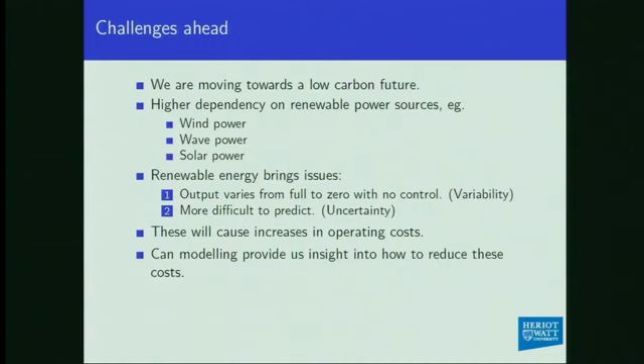So the question is, can we model these? Can we gain insights from some simplistic models, which will then feed back to help us understand how to reduce these costs? So hopefully you'll see these are really quite simple models which try and capture something about what's going on. They're not going to be realistic in any way, shape or form, but I hope they give us some qualitative insight as to what's going on and the behavior, and understand some of the statistical properties which are important for the systems.

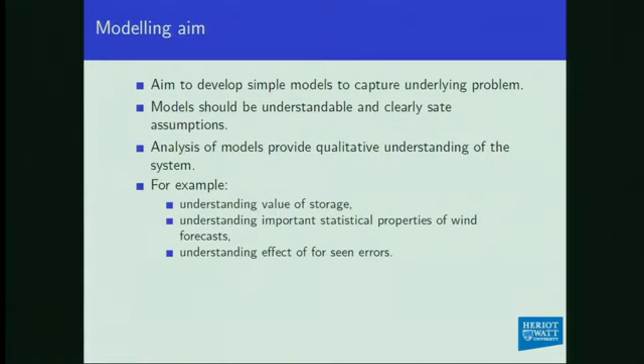So the sort of questions we're trying to look at answering here are understanding the value of storage, understanding what sort of statistical properties you want errors for the wind forecast to look like, what are bad errors, what are good errors, how do we deal with effects of errors we know are coming, but we don't quite know how big they're going to be or when exactly they're going to come up.

So I'm going to look at three models. I'm in the sort of wrong order for the talks, but each one really relates to one of the talks coming after me. So the first one is going to be a very simple model, which actually you've seen most of already, because Jean-Yves gave a fairly comprehensive talk about this. But we've been looking at it from a slightly different perspective, and we're also starting on some of the extensions beyond what he did. So in a sense, that model you've seen before, but I will go through that one in quite a bit of detail as well, and also talk about a slightly different perspective on demand shifting, how demand shifting might fit into that modeling framework.

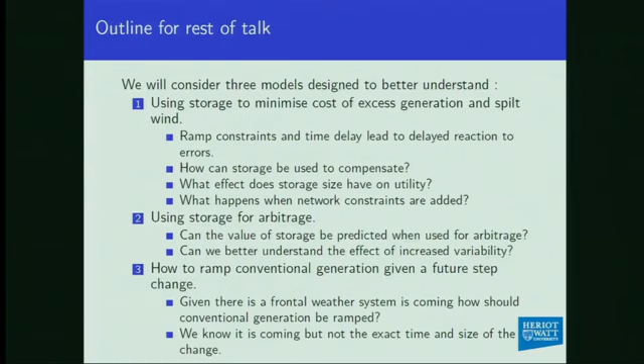Then, so that's using storage in some sense for reducing reserve setting and excess conventional generation. Another use of storage, which is often touted as one of the main values of storage, will be in arbitrage. So can we start to get a feel for what the value of storage in arbitrage is going to be? We're going to take a very simplistic view. We're going to assume that we're God, we know everything, and we're going to run our store the best we can and try and understand what the policy looks like to run the store, and then start backing off full knowledge.

And then finally, if we know something's going to change in the future, we know there's going to be a change in the sort of setup. So for example, a frontal system is going to come across the UK, but we're not sure exactly when it's going to come, exactly how big a change it's going to bring with it. How should we be looking to ramp our conventional generation either up or down at that time to deal with that change, to minimize our costs?

Okay, so I'm going to look at these three. I'll look at storage for balance, and then storage for arbitrage, and then finally minimizing cost errors. So storage for balance. So we're looking at developing a sort of framework to study storage in terms of balance, and also then think about the issue of, can dynamic demand fit naturally into this sort of framework? Is dynamic demand, in some sense, for these purposes, just the flip side of storage when we look at these sort of simple models?

And one of the driving questions that I've been interested in is, we talk about wind data. We know we don't have enough wind data in many circumstances. So if we're going to create fake wind data, can we understand from these simple models what statistical properties fake data really should be doing well? Because no fake data will do everything well. So can we understand what the fake data should be trying to do as well as it can?

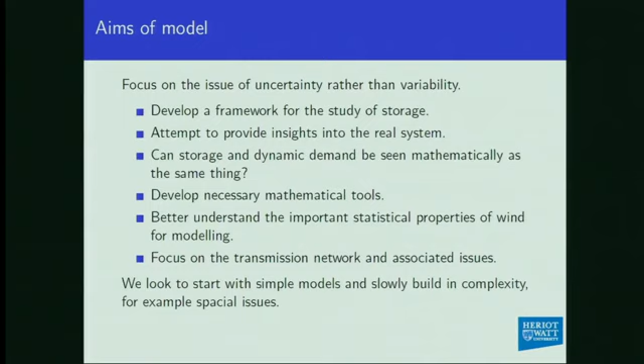And for this talk, I'm going to be thinking about transmission networks and associated issues, none of the DNO stuff that we saw yesterday. But there's lots of interesting problems there, and I'm sure lots of interesting talks from that perspective later on. And it's very simple models. So very similar to Jean-Yves' simple model, these are going to be very simple models. We'll start with single stores and build up from there.

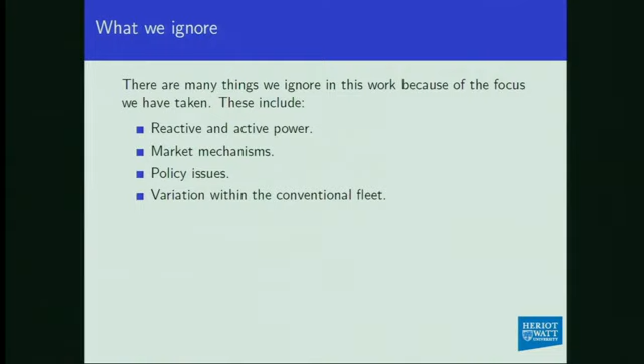So, as I said, I'm going to be quite open that I'm ignoring lots. And here are some of them, and I'm sure there are many more, and I'm sure that the engineers will tell me I've ignored huge amounts as well without realizing it. But things which are often talked about which we're ignoring are reactive and active power, ignoring all the market mechanisms, ignoring all the policy, and ignoring any variation in conventional fleet.

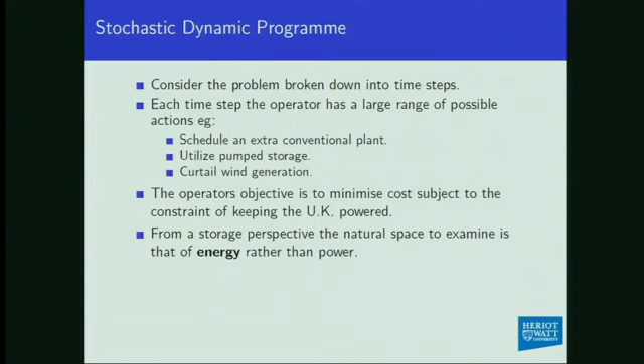So the setting that we're going to be thinking about this particular model in is stochastic dynamic programming. So we're going to be doing this in discrete time. So each time the operator has to make decisions. So it's going to decide how to schedule conventional plants, how to utilize pumped storage, and then how much curtailment of the wind generation should be carried out. And what we're really looking here is to minimize cost subject to keeping the lights on. And it turns out that rather than power, we should think about energy. It's a much more natural setting for these sorts of problems.

So given we're thinking about stochastic dynamic programming, what is our constraint going to be? So the aim is to keep the UK powered. How are we going to model that? So a hard constraint is not applicable. There's always going to be a chance that you won't do it. So instead of a hard constraint, we're looking at a probabilistic constraint. So what we're saying is that an admissible policy will be such that the probability of failure is less than some given probability. So that's what an admissible policy is going to be in this setting.

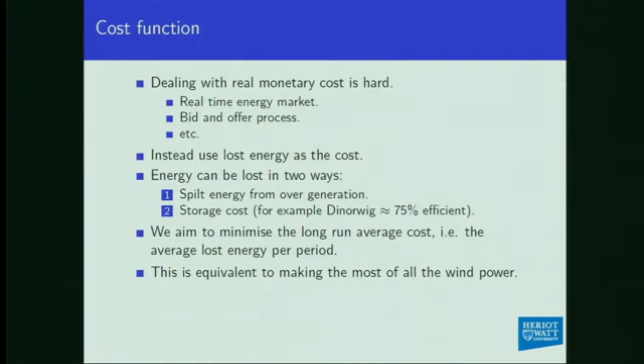So now we want to think about cost. Dealing with money is hard. You have real-time energy markets, you have bid-offer processes, you have all sorts of complexities coming in. So let's pretend we're not going to deal with money itself, but instead minimize lost energy as a proxy for money. So we're going to be minimizing lost energy in two ways: one, through spilt generation, and the other through storage cost. So this should be thought of as the efficiency of a storage system. And we're looking to minimize the long-run average lost energy per period.

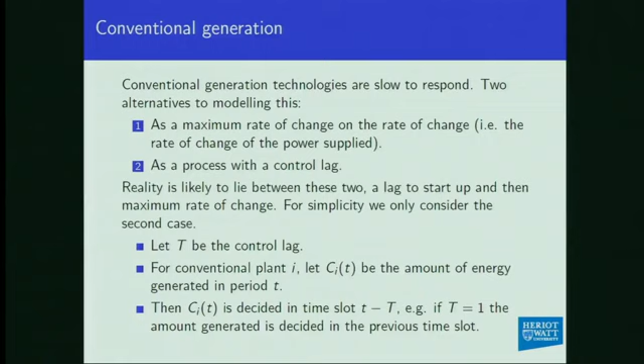So now we've got our cost, we've got our constraint, so we now need to put in our generation. So conventional generation is slow. And this is, in some sense, driving all three of these models. And this is slow often in two regards: there's a ramp constraint, or there's a control lag. Reality is somewhere between the two, and both really apply. For this model, we're going to ignore the ramp constraint at the moment. That will come back in as we move along this work. But we're going to be doing it via a control lag. So for our conventional plant, you have to schedule its generation some number of time periods in advance.

So then our storage. Here we're going to think of storage as being quantified by three parameters: the capacity of the store, the rate constraint, so the amount you can put in and out in each time period, and then the efficiency of the store, either through moving in and out, or through leakage in the store.

So then we need some notation. A_jt is going to be the amount of energy in and out of a store at time t. For those who've spent time around queuing theory, this is just a double Skorokhod reflection. You basically take the amount you have in store, add on what you're adding in or out, and then lose a bit for efficiency. And then you have a max amount, and you can't ever go below 0.

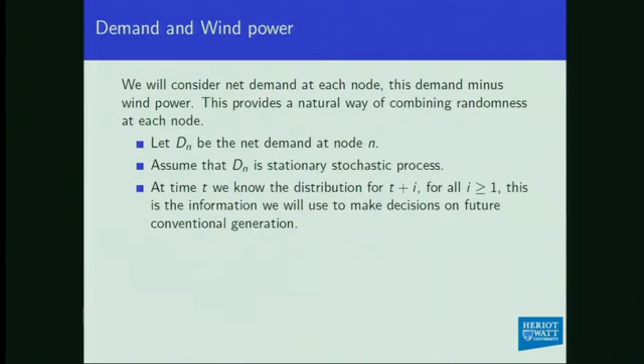So we've got conventional, we've got our store, so finally we have our demand. We have a net demand process. Pretty much for everything I'm doing here, I'm thinking about net demand, so that's actual demand minus wind generation, and that's where our stochastic process is coming in. We'll assume it's a stationary stochastic process. We don't know exactly what it is, but we have a distribution for it, and we make use of that distribution in making our future decisions.

What I've done already is all sort of less controversial. It's what Jean-Yves did. This one is slightly different, which is saying that this whole modeling setup for storage and dynamic demand can be thought of, if you squint your eyes a little bit, as being very similar. Storage is moving generation through time on the supply side, whereas demand shifting is moving demand through time on the demand side.

And again, for a demand response system, you have a rating you can put in and out, the maximum power that you could shift at any point in time, and the amount of energy that you can shift. There is a gain, which can be thought of as a leakage, or, as Jean-Yves said, you might need extra energy to compensate for the demand you've shifted through time. So demand shifting is going to look very much like just another storage system, and you can quantify it with the same triple set of parameters.

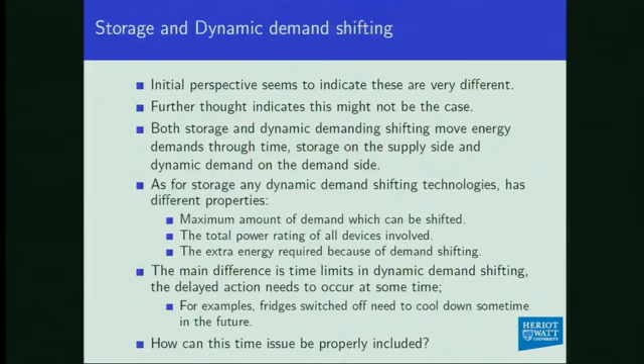But we now have one issue that we didn't have with storage. With storage, if I put a piece of energy in, I don't care when I take it out again. But with demand shifting, there's a time limit. This is still very open, and we don't think we have the formulation quite right. There's only so long you can keep things in demand shifting. So I think we can put demand shifting into this framework very easily, but there is some issue still to be carried on there.

Okay, so now you've set up a quite general framework. What do you do first? You go with a simple model. You look at a single store, one single conventional thermal plant, and a single demand. And you make it even easier: you go for 100% efficiency, no input-output rate constraints, and a single capacity store. That simple model is what Glyn will mainly be talking about later, with some more bells and whistles, but that's where we started.

The next couple of slides will be where we would like to go. We don't have any results for them, but I think they're the natural next steps with these models. So the first one is you keep everything the same, but you add a second store.

Why do you think about second stores? Because you might have a situation where you have a very large store where the rate in and out is relatively small, so think Dinorwig or such like. And then you might have a second store which is much, much smaller, but its rate is much, much larger.

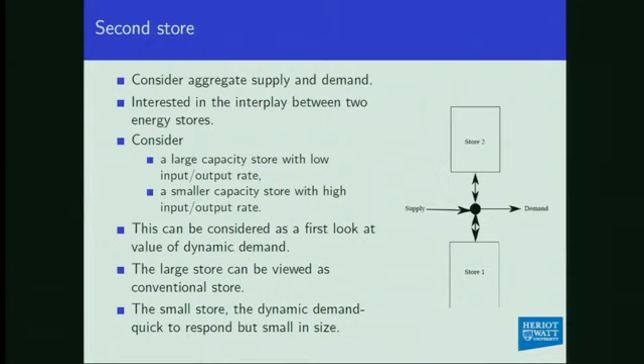So here you're thinking of dynamic demand, where you can do a lot very quickly, but you can only do a small amount of energy shifting in that case. So how do you play the two against each other? How are they useful to be played against each other? So that's the first case.

And then you add a link. So now you start adding spatial: you add two demands, you add two conventionals, and you add a link, and you start to see how we play these across the link. If the link has a single finite capacity, because we only have a link, we don't have to worry about Kirchhoff's laws or anything like this, but it does at least start to get some sort of spatial issues going on there.

At the two extremes, you can see that if the link capacity is 0, then really this is just two separate systems. If the link capacity is infinity, it then degrades into the same system we saw before with just two stores. So how does varying this link give you extra benefit in terms of cost reduction for the system? How does it move smoothly as I change the size of this link?

And you can think of this sort of situation as a quick model for things like what happens if you put storage in Scotland and storage in England, and you have a finite capacity between the two, which we've heard already this week exists, and we have these problems with wind in Scotland and not being able to get all the wind into England. Okay, so that's our first model. That's what Glyn will talk about later.

So now we move on to our second model, which is storage for arbitrage. This came out of discussion with Janusz, Frank, Richard, Stan, Chris and I, about whether we can capture and understand the value of storage in an arbitrage market, where we're going to start by assuming we're God, and saying, if I'm going to run this store as best as I can, what would I do? How would I be running it? How do constraints on the size of the store and the power flow of that store affect what's going on? So we start by assuming no randomness.

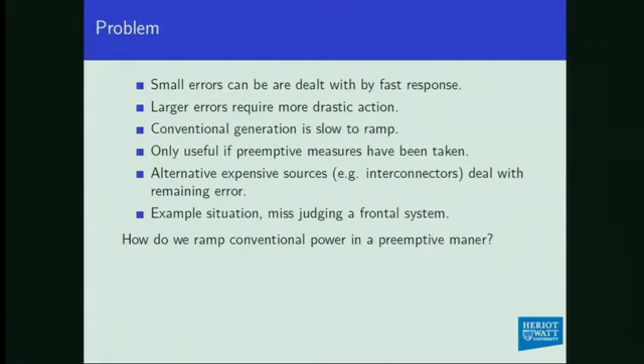So we have errors in our system. Small errors can be dealt with quite easily by fast response, but large errors require more drastic action. As I've said many times in this talk and throughout this week, conventional generation is slow. If you have one of these errors coming, you know there might be an error coming. When I'm thinking about this problem, I keep in the background of my mind a frontal system passing across the UK. You know it's coming. You can't quite predict exactly when it's coming. You can't quite predict exactly how big the jump will be. How are you going to be ramping your conventional generation to deal with that, to minimize the effect of that sudden change in the way the system behaves?

So if you're going to use conventional generation to deal with this error, you have to do something preemptive. So what preemptive action should you be taking? If you fail to preempt fully, you still have to keep the generation on, so you have to go either to your fast reacting plants or your interconnectors or somewhere where it's very expensive to get the power from at short notice.

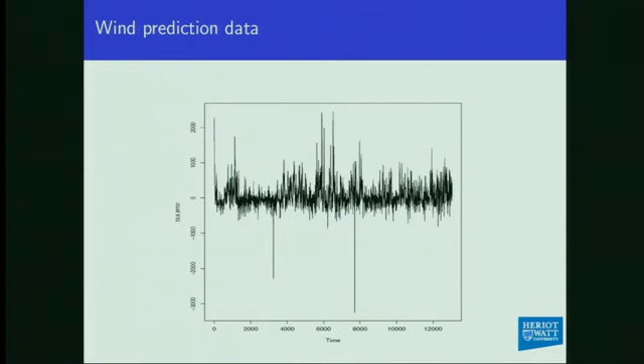So just to give you some sense of what I'm talking about, this is a plot, this is some data that we got from Andrew. I stole it from Ksenia's slides. This is the predicted wind error data. These are the errors. So there's lots of errors, but really what we're wanting to do is strip out a lot of the small errors, let's just assume they can be dealt with elsewhere. And then what you get is something like this, where, to people who have spent time around processes, what you see here is what looks like a point process marked with sudden errors.

So what we're really thinking about here is modeling this with a marked point process. For simplicity, we're going to work in continuous time. Results really should carry across in both cases. So our error is going to be a marked point process with shock errors. And we're going to have two costs: the cost of failing to cover our error, which is what we need to spend on our expensive generation, or a cost from this ramping of conventional generation when we don't necessarily need it. And what we want to do is minimize the long run average cost.

So we now have a conventional generation. We put in some ramp constraints. The ramp constraints here we're going to assume are on the first derivative of the amount we can provide for conventional. And then we have these two costs, C1, which is the cost for failing to meet our error, and C2, which is the excessive conventional generation that we're going to need.

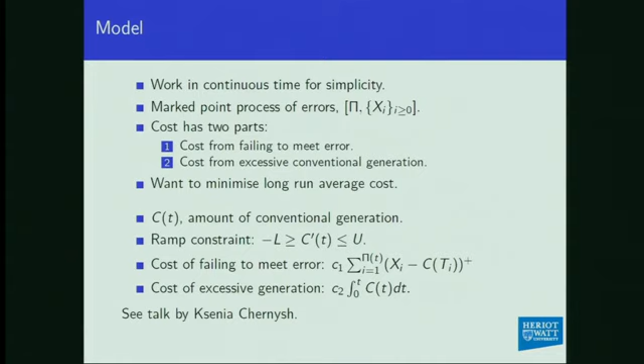So for more details about that, see the talk by Ksenia later. She will talk about what happens as we look at various cases for this point process. She'll start by thinking about deterministic point processes and then move on to some more interesting cases. Okay, so I think that's all I have to say.